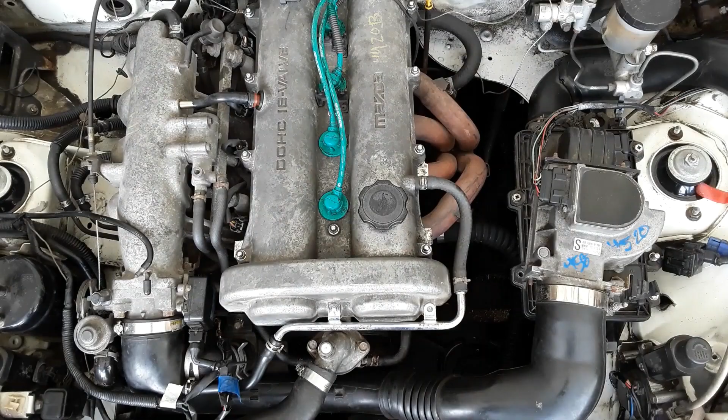Ladies and gentlemen, it's Judgment Day. We are finally going to put in the Supercharger. Oh god, my thumb didn't only went out that far in front of me. There we go, much better.

I'm going to have this top-down view of the first part of the Supercharger installation process, which is the removal of everything else going on inside here. Just follow along, I'll narrate some things for big steps, but otherwise we're going to start with removing a couple pieces, being the snorkel, which is over here, just off screen. It's attached to our intake, we'll be taking that off. This cross pipe will come off, and then this part of the cross pipe as well, and the throttle body over here to follow.

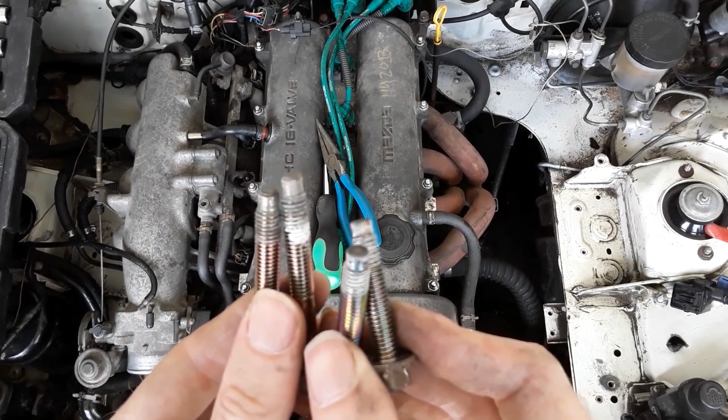To the person who used anti-seize on these bolts, thank you so much.

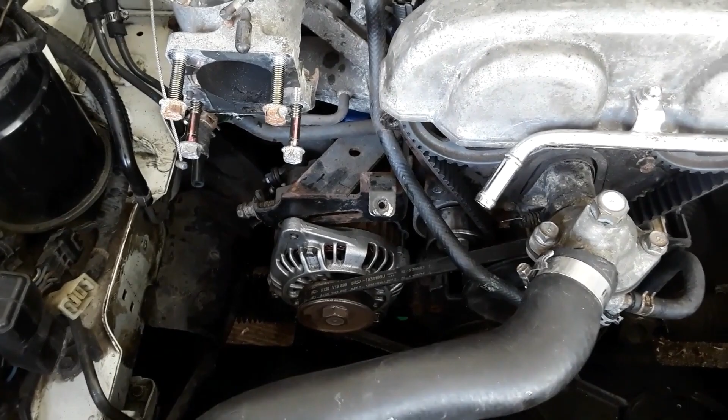There is so much space in here with all that junk removed. Next up, we're going to start adding pieces back in. So take everything out, video is showing about 24 minutes, not too bad. Just be careful of all the extra fluid that may pop out on you. Otherwise, I think that's the easy part, unfortunately. The hard part is usually putting stuff back in.

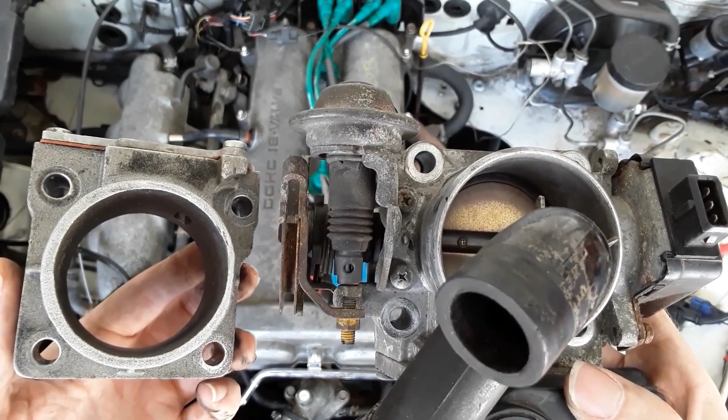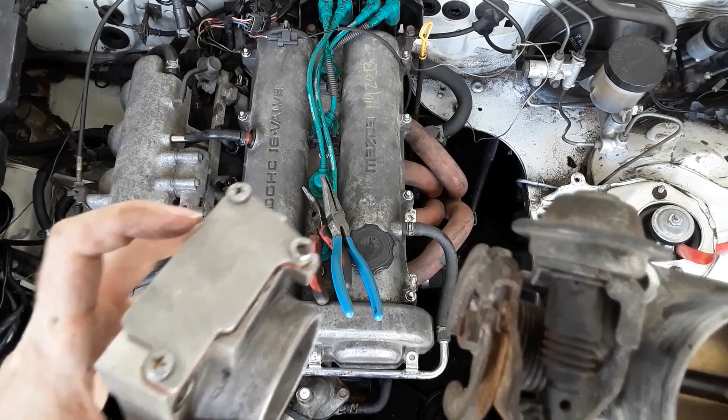First step after the disassembly is you need to start swapping out parts from your actual intake, your throttle body, over to what we call your dummy throttle body. What's coming off is this bottom plate over here, it's going to be swapped out with this part over here. This one's held in by 3 screws, boom, boom, and then there's one more down here. Sorry, that hurts my wrist. So we're going to do the whole swap-a-rama here. Shouldn't be too hard, hopefully.

Alright, we are swapped, boom, boom. So the dummy one, if you notice, doesn't actually have the butterfly valve in it like that. This one does. This is going to end up going over on this side closer to the supercharger, and this is just going to allow air to flow right through it back into our intake manifold. I'm going to put this on very loosely because we will need a new gasket for it, but otherwise this right here, done. And then this is going to be used later in that section.

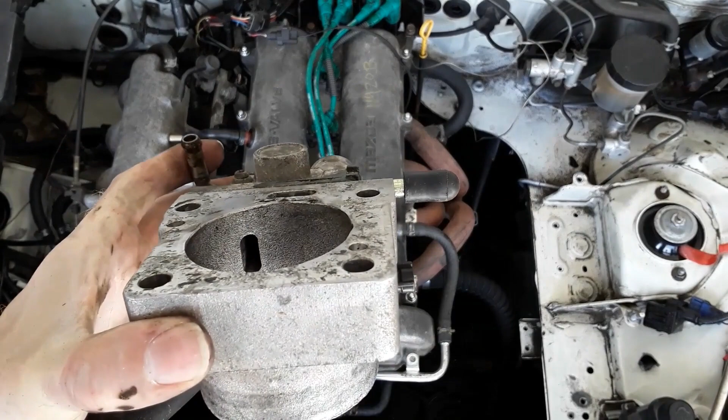Again, we're just going finger tight right now because it's not a good seal. I have to scrape that off later, but I want to get it assembled and see if we're missing anything critical.

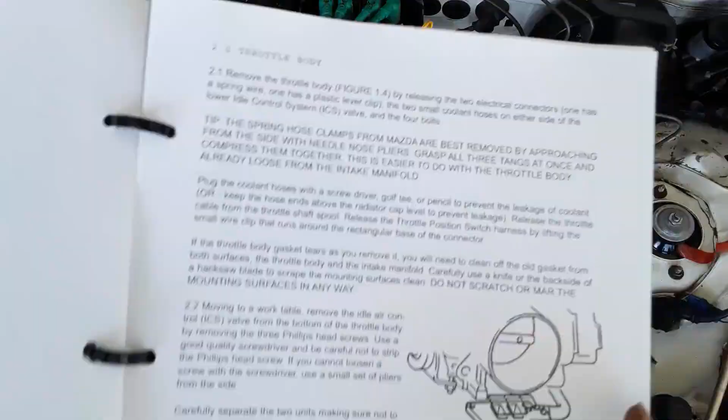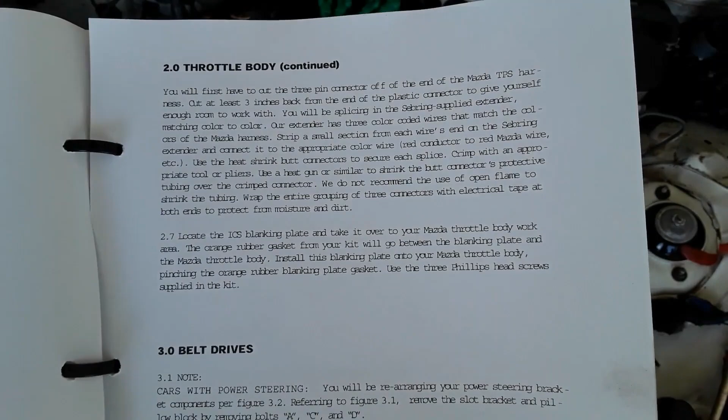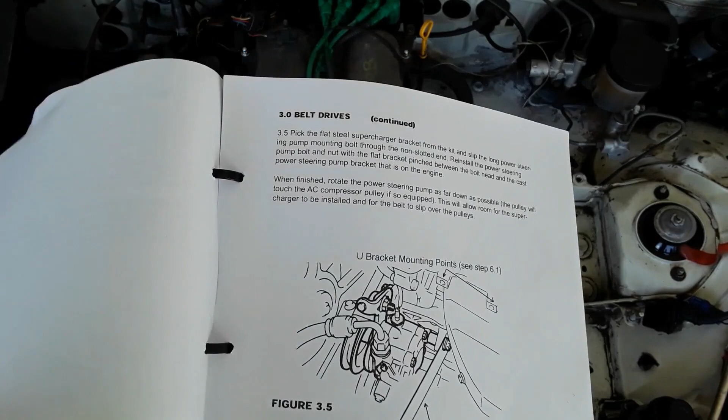Check, next page, alright. We don't have power steering or AC. Oh, but we do. Beep, beep, beep, beep, beep, beep. Alright, none of that. Useless, just extra weight and more things that could break. Something else that could break that we don't have. I think I went too far. Nope, didn't go too far. Keep on going, it's nice to make some progress.

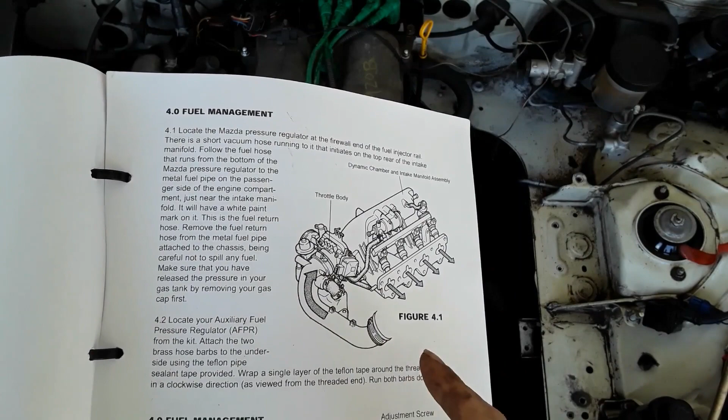Alright, fuel management. So if you take a look right here, this is the crossover pipe, so I guess we could start with that. This will go on, I just haven't figured out where I want to mount it yet, so we're skipping this step temporarily. We're going to go with that step.

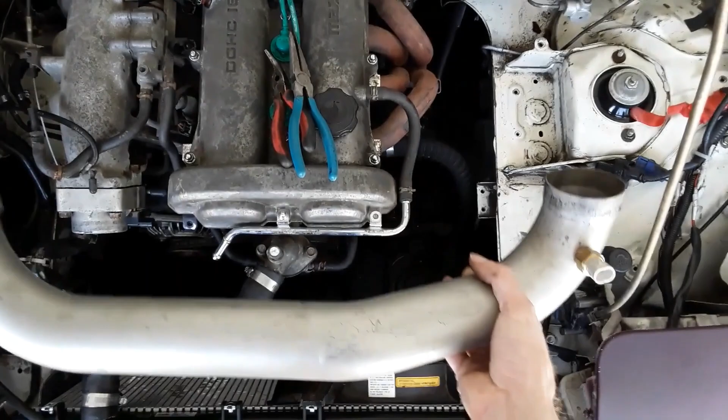Nope, just me being an idiot. This doesn't come till much later. Goodbye. Alright, next up. Alright, this still fuel.

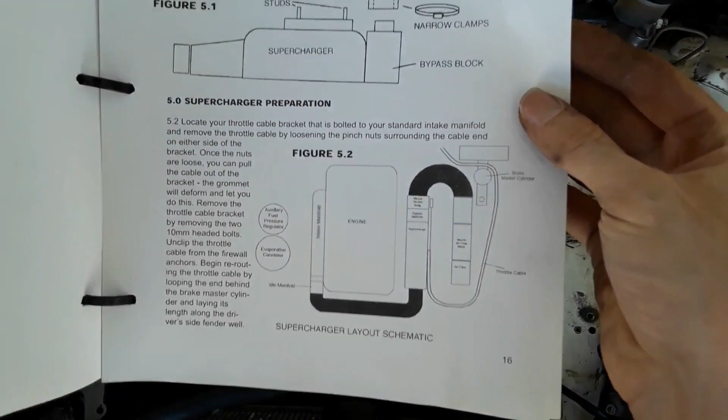There's the Supercharger Preparation, so I already have that done. If you take a look down here in the bottom section, that is showing you kind of how things are set up.

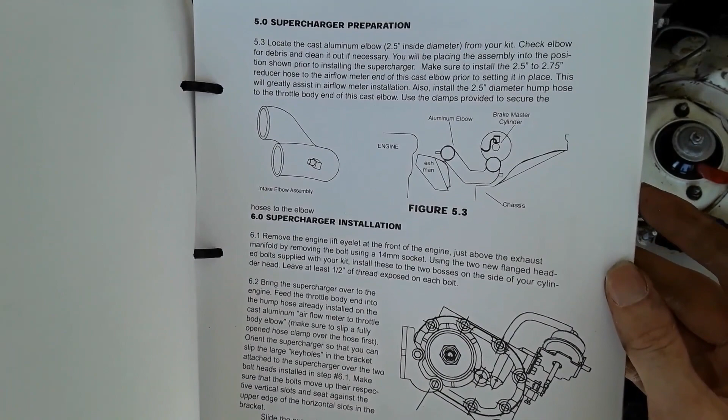Supercharger Preparation, Supercharger Installation. So first up is the flange that we needed to get welded, that's going to go on the side. Boom, that new weld-on piece right there, it's going to go on the side over here.

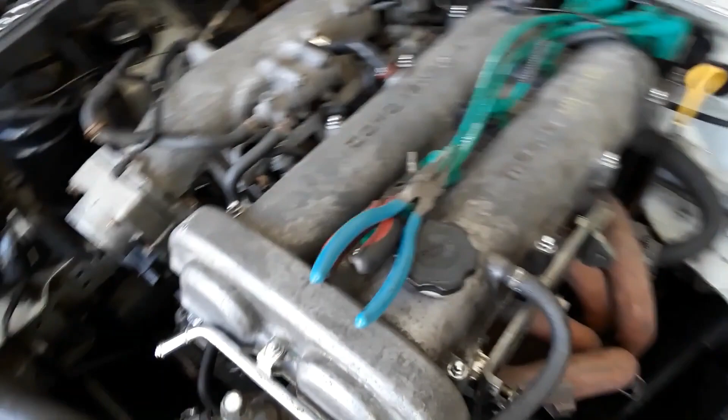Well, we've hit a wall because I only got one good bolt and one just holding it in right now as a placeholder, which means I'm going to go find out what length these should actually be to go in here, because if these aren't right and this holds a supercharger, the supercharger is going to flop around and could become like a 50-pound projectile, and I don't want that. Plus it cost me more than I want to admit to get this, so yeah, gonna have to go find the real bolts.

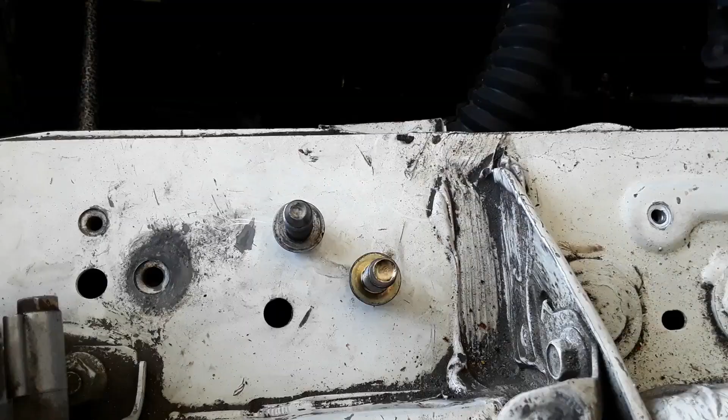I'll tell you, there are few feelings that beat the feeling of finding a bolt in your extra stash that mates perfectly with the hole and thread count that it needs to go into and is the right size. So we saved ourselves a trip to the Home Depot, and we'll put those bolts in and get our bracket put on.

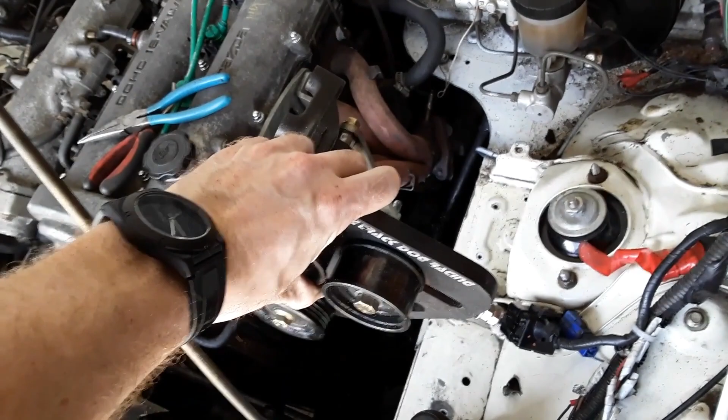Well, look at that. That is mounted in there nice and tight. So what's coming up next is an extra mounting point, which is going to go on down here. If the car did have power steering, that's where it would be. But instead, we are going to replace it with this Track Dog Racing pulley. So this will mount there. It's going to be turned sideways as such, and that's going to run the belt across our crank pulley down there, through here, and over the supercharger pulley.

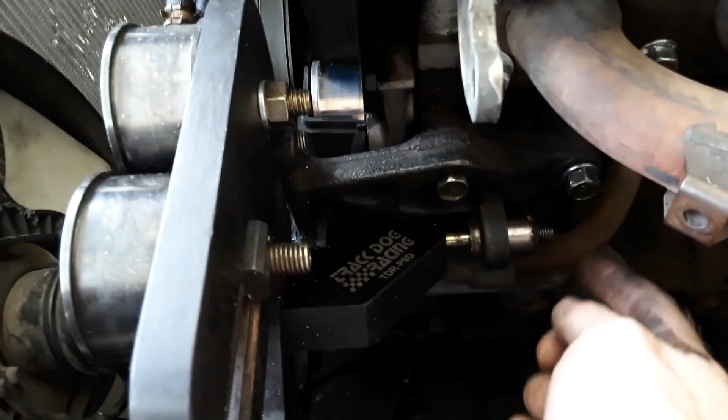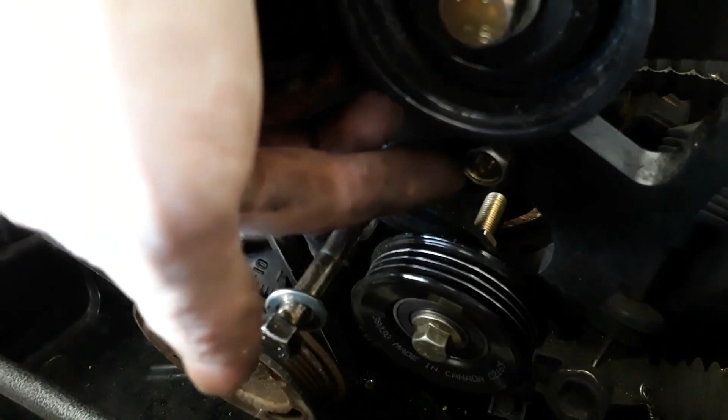Another wonderful rookie mistake. There's the third mounting bolt that goes in down here. Unfortunately, this bolt blocks it off. So make sure you keep the bolt retracted as far as possible when you're doing that. Pull it back so you have access. And then this actual part right here, loosen up the bolt that is right here. Oh, there you go. Right here. That's going to allow this part to pivot down so you have access to get that third bolt in. The more you know, kids, the more you know.

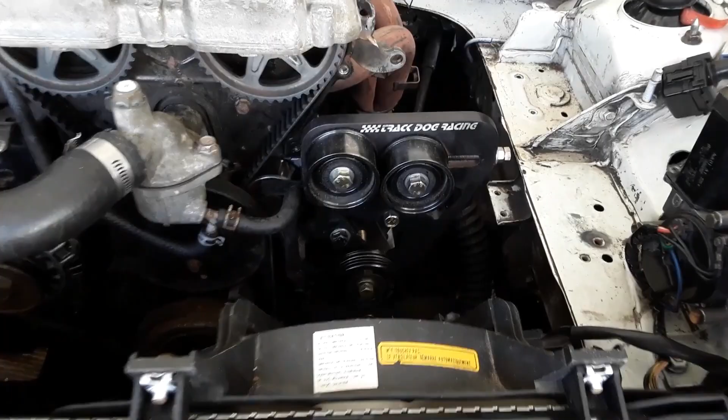There we go, ladies and gentlemen. This thing, I could do pull-ups now if I wanted to, but it's locked in there. It's ready to go. We have our support arm right here that will hook up to our supercharger later on. The bolts, after a little bit of a struggle, are all in there. So we have a solid point for our belt. Next up, supercharger.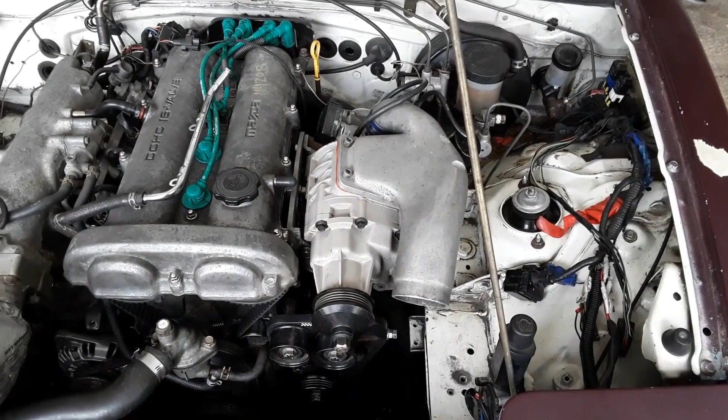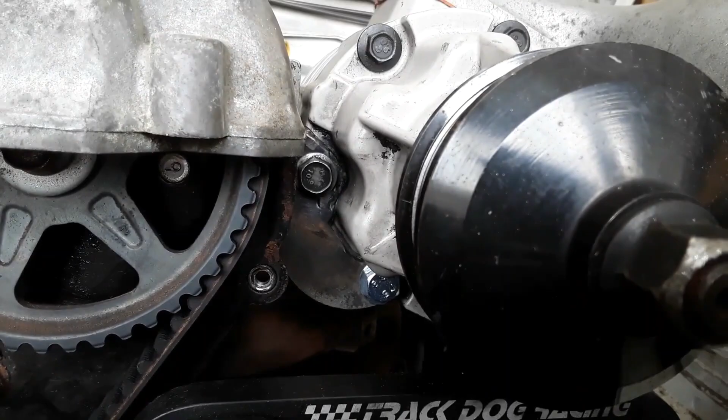Don't tell my special lady friend, but that is one of the most gorgeous things I've ever seen. So it's in there. We've got 2 bolts right there that you have to snag and put those on the bracket. And on the back side, there is 1 bolt that was kind of awkward, so I was curling it in there. And I had a little bit of play with this, so I loosened that one up, and I also loosened up our old throttle body to give me a little bit more clearance to work with, so I'll have to tighten that stuff down.

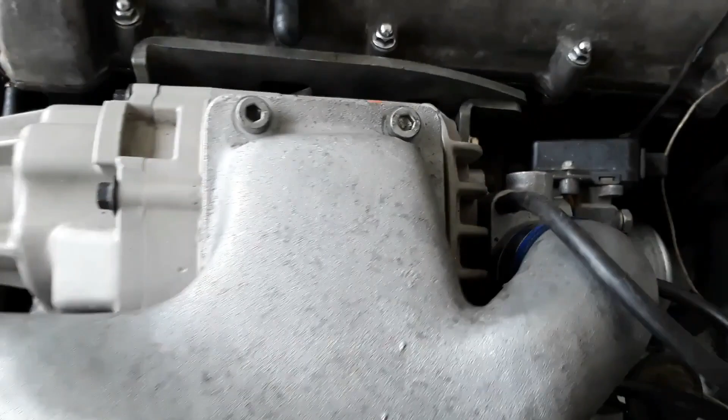But otherwise, check dust! Past that. So we are one step closer to having this thing supercharged.

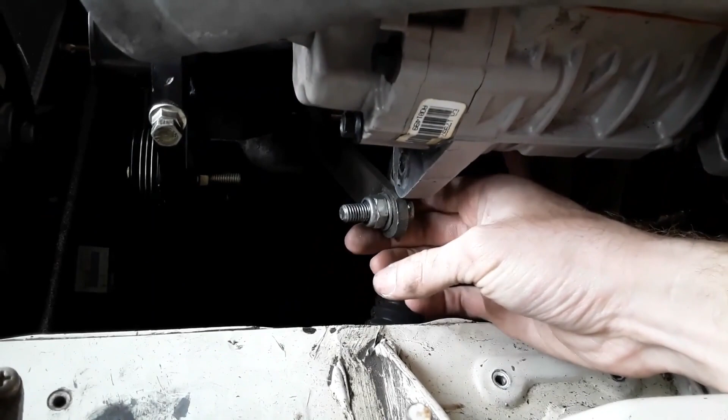There is one bracket underneath the supercharger, so it's this arm right here. It's going to come up, mount in there, and the back side, there's a... sorry about that, your ears, my apologies. Right here, this backside bracket, that's actually where the throttle body wire is going to connect now. It's our throttle wire, which allows us to go very fast.

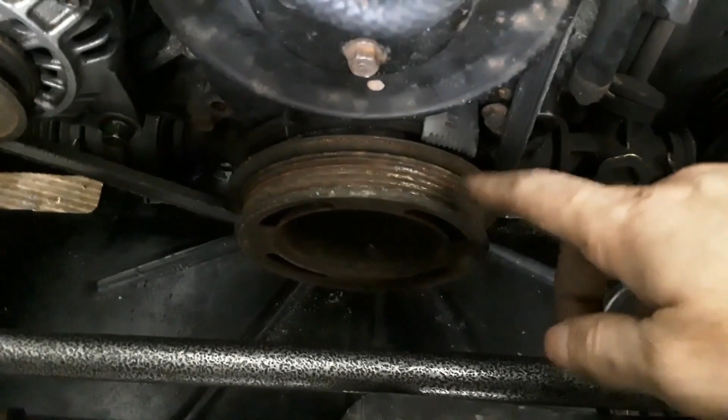Vroom, vroom. All right, so next up, we're going to try and get the actual belt looped on here. So it loops around the supercharger pulley, this idler pulley. Then there is one more pulley down here, and the actual pulley that's going to drive this thing, which is connected to the crankshaft. So the crank pulley, idler pulley, this is an adjustable one. We can move it back and forth, so that'll help us tension it, and then it'll loop over this.

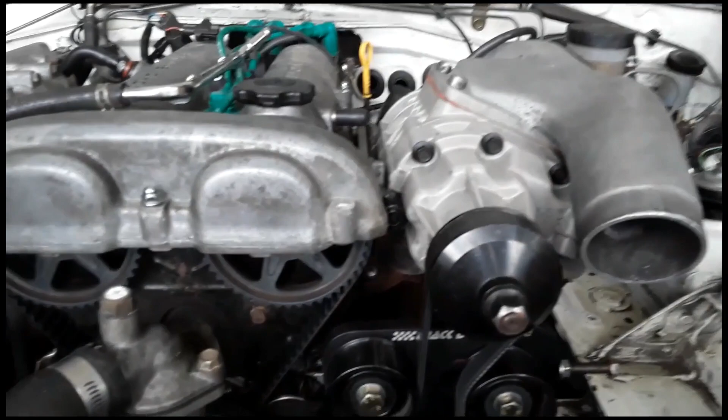That actually wasn't too bad. So it snakes around, like we said, down there, and then it disappears into the darkness. But the Track Dog Racing pulley has this nice auto tensioner over here, which lets us just crank on it to make everything nice and tight. Take a look, the ribs are very well centered there. They're underneath this bracket without issue. And then down here in the abyss, right in the grooves, exactly where we want it.

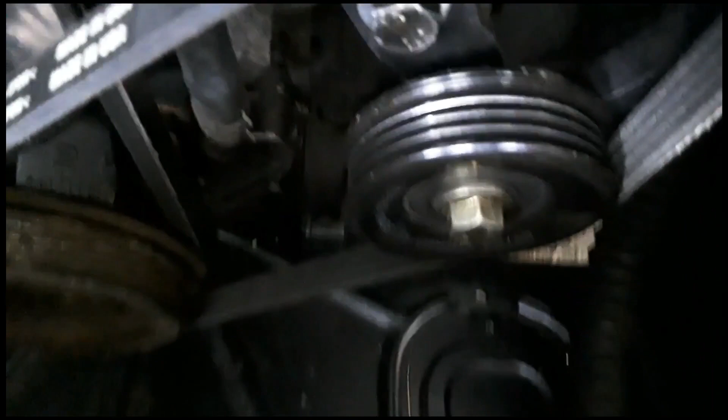So, one step closer. Let's get some more hardware on here.

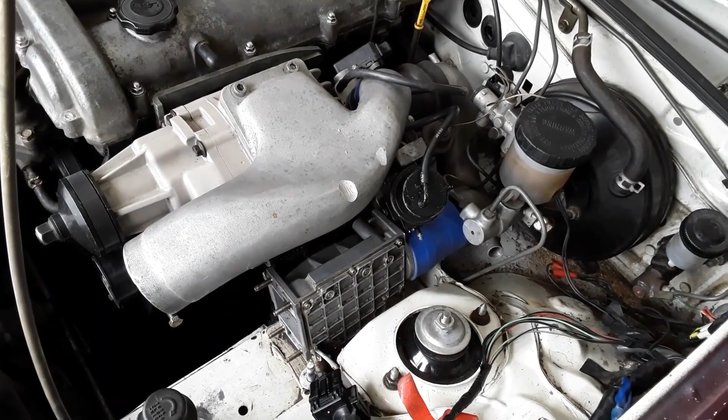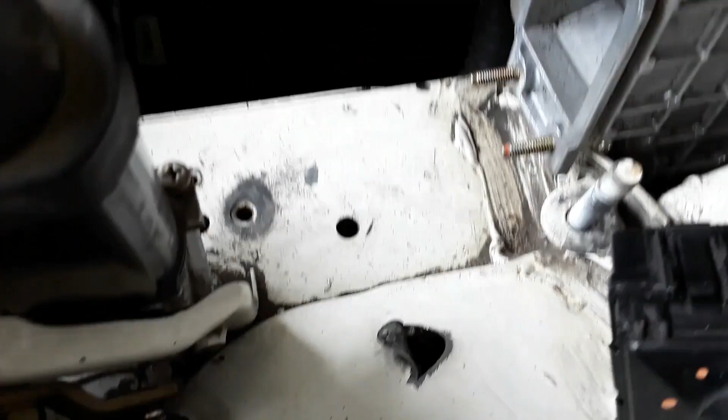While trying to put in the intake, you need to bend down that white tab right there, which I'm going to try not to do, but they recommend it. Then there's this bracket, which normally holds one end of the stock airbox in. There's a bolt located right there that you can take out, and this whole piece will come out with it to give you some more space.

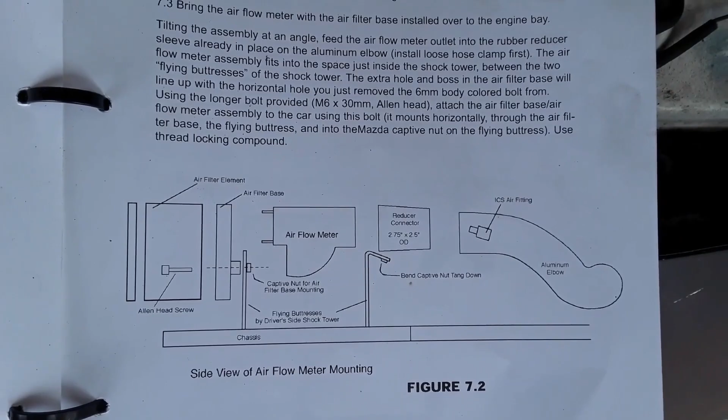Otherwise, we are going to install the spaceship next. So it's not really a spaceship, although that would be pretty sweet. This is actually an adjustable fuel pressure regulator. It'll help us keep the correct amount of fuel going in with the new amount of air that we're shoving into the cylinders.

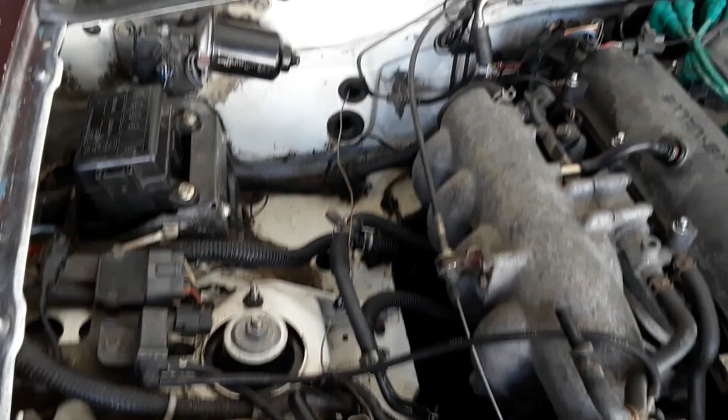First thing you're going to need to do is pick out a location for your spaceship to land. I'm picking the firewall on the passenger side. It's pretty flat, easy to use, should be easy to drill as well. That's the hose we're going to connect in and out of the ports where the fuel's going, so it shouldn't be too bad.

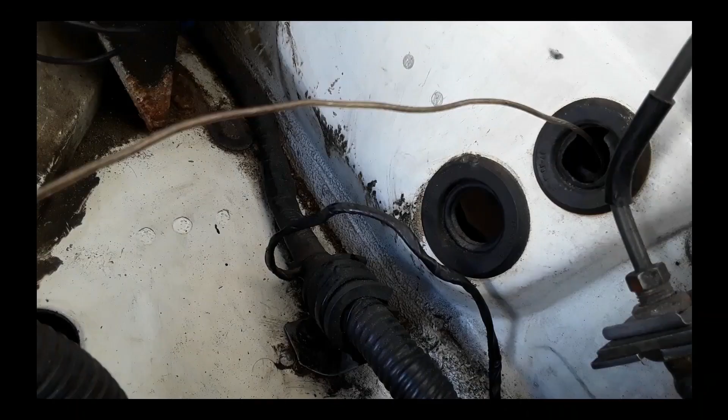I marked up the new locations for the drill, and I'm using some older drill bits, so please don't insult my drilling ability—it is terrible, I'm well aware. I should be using a center punch, I'm lazy, I'm not, and here's a classic example of why you should definitely use the best drill bits available, as well as a center punch if you have one. So enjoy my misery, laugh at my embarrassment, but I did eventually manage to drill through both locations.

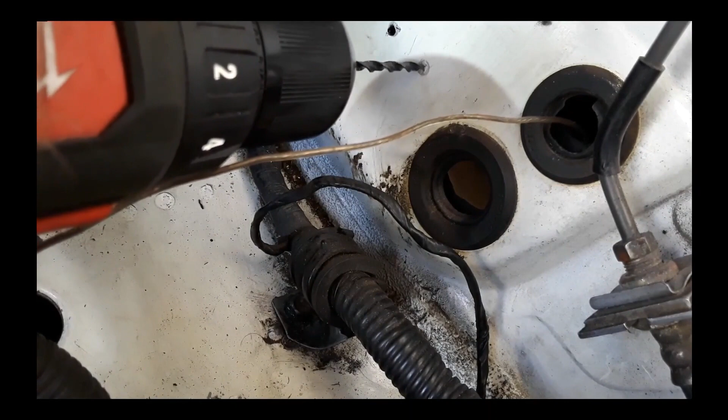This seems to be the common place to mount these. The other option is the passenger side shock tower, but I didn't feel comfortable drilling through the shock tower because I don't want bolts anywhere near the wheels or in the wheel well. This spot is pretty secure, it's up top, it's out of the way—but again, to each their own. See? Successful. You gotta be persistent.

That was a commitment cut right there.

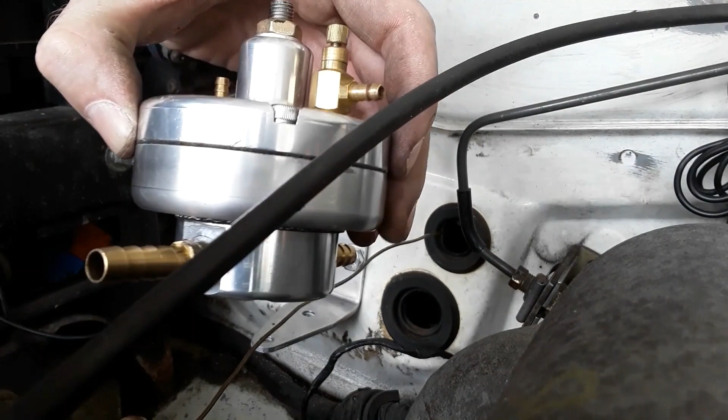So for the UFO, aka the adjustable fuel pressure regulator, you need to make sure you know which side is the inlet and which side is the outlet. By that I mean which one has fuel going into the port and which one has fuel exiting the port—it should be marked somewhere for you. So right there, let's see if we can adjust it. That's the inlet, coming off of the actual stock fuel pressure regulator, so you want that side closer to the actual engine.

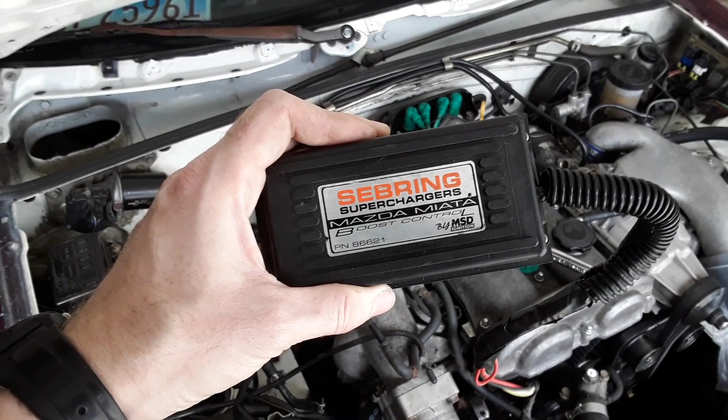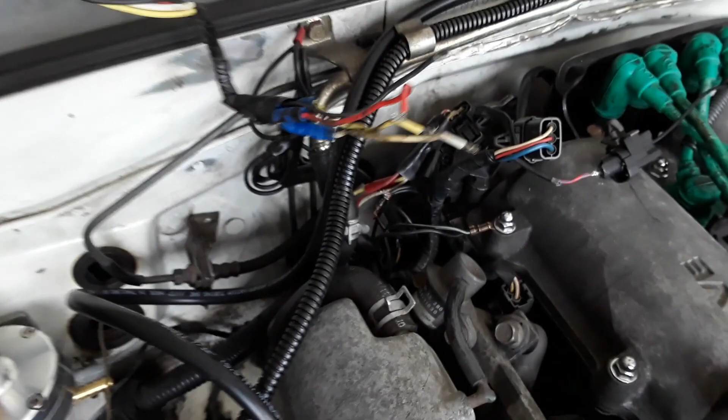At this point, all the hardware is in. Now it's time for some software upgrades. We have a Sebring Mazda Miata boost controller, which will help us with the electronic timing for the firing of our spark plugs. That's going to get wired in back here to our crank angle sensor.

If you take a look right here, someone at some point chopped this up, so I'm going to have to undo that work. It shouldn't be too bad because it's just about 4 or 5 wires that we need to solder in here.

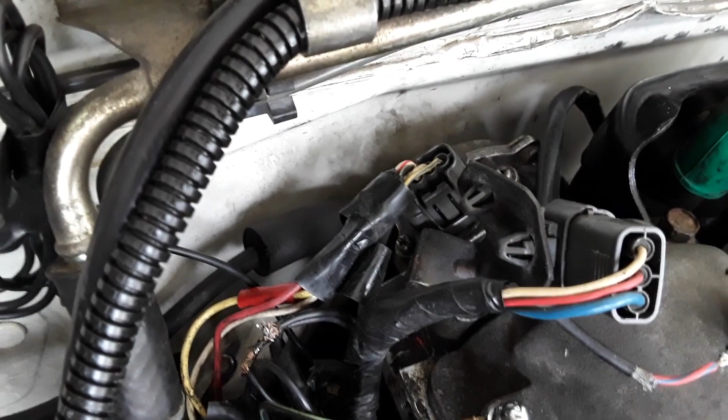Hello, little doggy, how are you doing today? I think he meant okay.

Anyways, we are done splicing and cutting in the wires. Soldering isn't too hard, but just getting access back here is a pain. Also trying to make sure the hot soldering iron doesn't melt through any other wires, like the one containing a bunch of gasoline—that's also a concern, but they're in there, they are secure.

We have a new electronic brain to help us out on this. One step closer to firing it up.

Crossover pipe is now installed. I can show you how to do that if you need to—it's not too bad, but definitely start by securing the supercharger end first and then work on the throttle body one. So we're real close to starting right now, but we got one more thing to get.

Unfortunately we all know how the stores are currently due to the world. So I need Teflon tape to secure these inside so we don't have any sort of fuel leakage in the engine bay, because extra fuel, heat, fire—bad times.